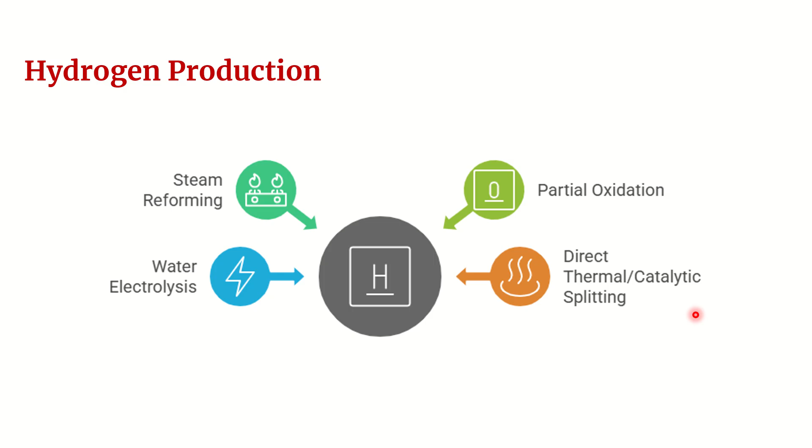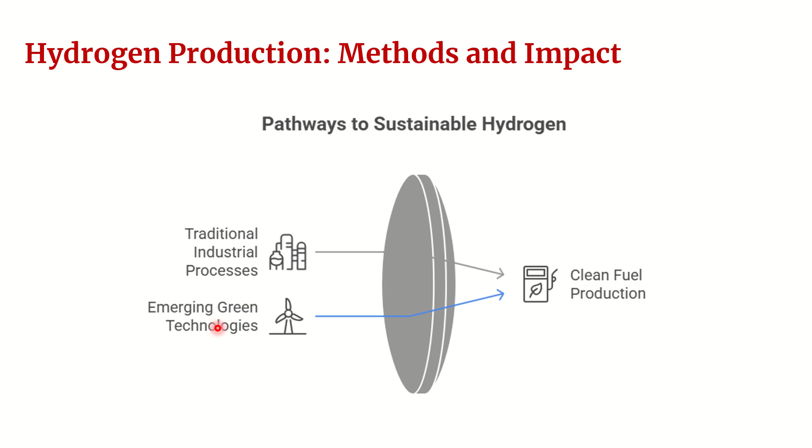The hydrogen production methods combine the traditionally available industrial processes and also emerging green technologies to produce the clean fuel.

Steam methane reforming is one of the methods of production of hydrogen. It is the most widely used method for industrial hydrogen production, primarily from natural gas, and it is a thermochemical process. The process involves the reaction between methane and steam at high temperatures around 700 to 1000 degrees Celsius and pressure 3 to 25 bar over a nickel based catalyst. The main reaction is methane with water to produce carbon monoxide and hydrogen, and it is an endothermic reaction which requires significant amount of heat. Process-wise and economically, it is an efficient method which meets the growing demand for energy.

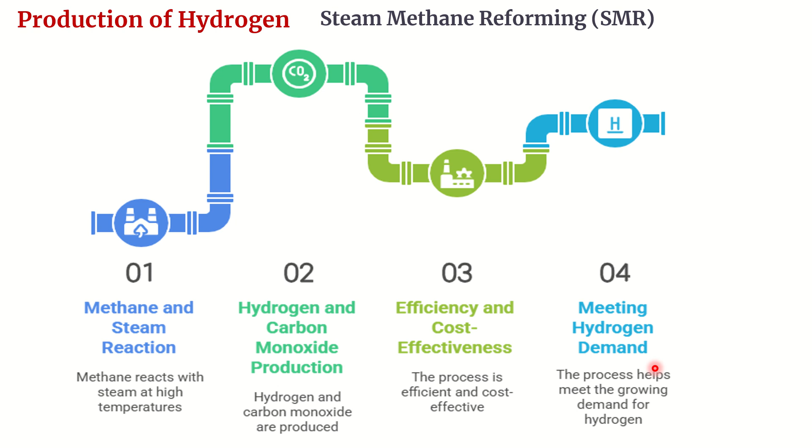Then the technical aspects with respect to steam methane reforming method. In this method, selecting a suitable catalyst is a prime factor. Mostly nickel-based catalyst on aluminum oxide are commonly used. The heat input, as I mentioned, it is an endothermic reaction which requires external heat, often supplied by burning a portion of natural gas or other byproduct gases. The reaction which converts methane and water into carbon monoxide and hydrogen involves an additional step, which is a water gas shift reaction.

The carbon monoxide produced is further reacted with steam in a second step to produce additional amounts of hydrogen and carbon dioxide. This occurs at lower temperatures, around 200 to 450 degrees Celsius, in the presence of a catalyst like iron, chromium, or copper zinc catalyst.

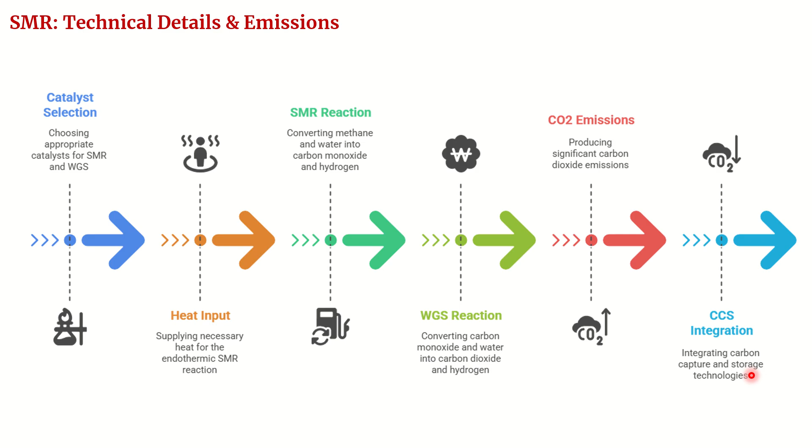This process, when integrated with carbon capture and storage, can yield blue hydrogen. If this carbon capture and storage integration is exempted, then it produces around 9 to 10 kg of carbon dioxide per kg of hydrogen produced. When combined and integrated with carbon capture and storage, the steam methane reforming process can produce blue hydrogen.

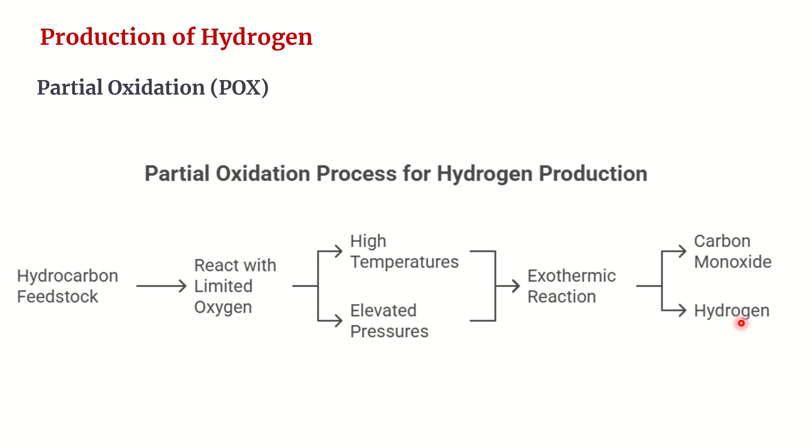Then the next method, partial oxidation. Partial oxidation is again another thermochemical process for hydrogen production, which is suitable for various kinds of hydrocarbons, including natural gas, fuel oil, and coal. The hydrocarbon feedstock reacts with a limited amount of oxygen at high temperatures around 1000 to 1500 degrees Celsius at elevated pressure, and it is an exothermic reaction. The reaction is methane with oxygen to produce carbon monoxide and hydrogen, and it is an exothermic reaction.

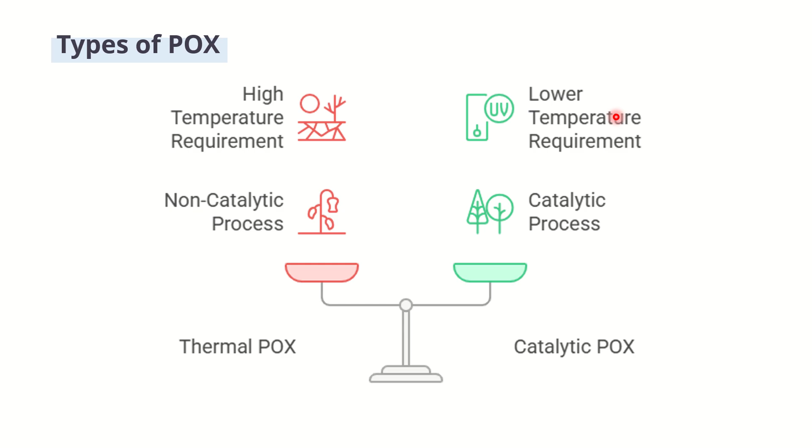The types of partial oxidation process are thermal partial oxidation process and catalytic partial oxidation process. Thermal partial oxidation process does not require any catalyst; it is a non-catalytic process but requires high temperature. Catalytic partial oxidation process, obviously, requires a catalyst, most often platinum on aluminum oxide, which operates at temperatures around 800 to 900 degrees Celsius. This process is generally faster and requires smaller reactors, but they are sensitive to sulfur impurities.

Then again, production of hydrogen by the water electrolysis method. Water electrolysis is a process that uses electrical energy to split water into hydrogen and oxygen. When powered by renewable electricity, it produces green hydrogen with near zero greenhouse gas emissions.

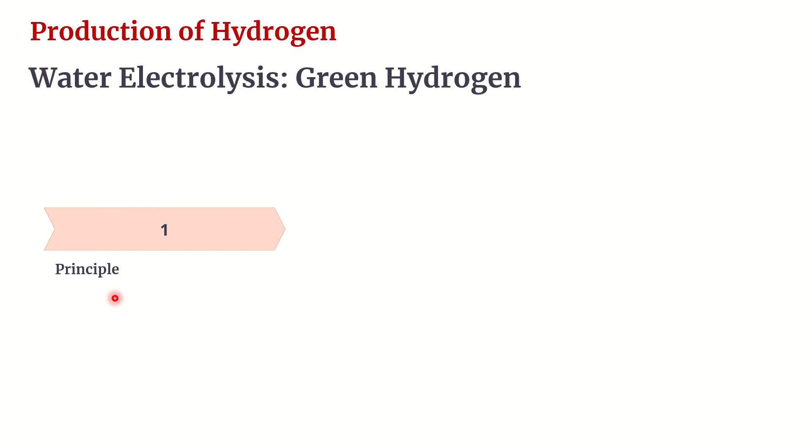What is the principle involved in this water electrolysis method? It is the reverse of fuel cell operation. What happens in fuel cell operation? In the fuel cell process, hydrogen and oxygen combine to produce electricity and water. In electrolysis, electricity is used to break down water to produce hydrogen and oxygen. So the overall reaction is: water, in the presence of electrical energy, produces hydrogen and oxygen. Water is split with the help of electrical energy into hydrogen and oxygen.

It is an electrochemical process which involves anode oxidation and cathode reduction. In anode oxidation, the water molecules lose electrons to produce oxygen gas and protons, which depends on the electrolyte used. Then in cathode reduction, protons or water molecules gain electrons in order to produce hydrogen gas.

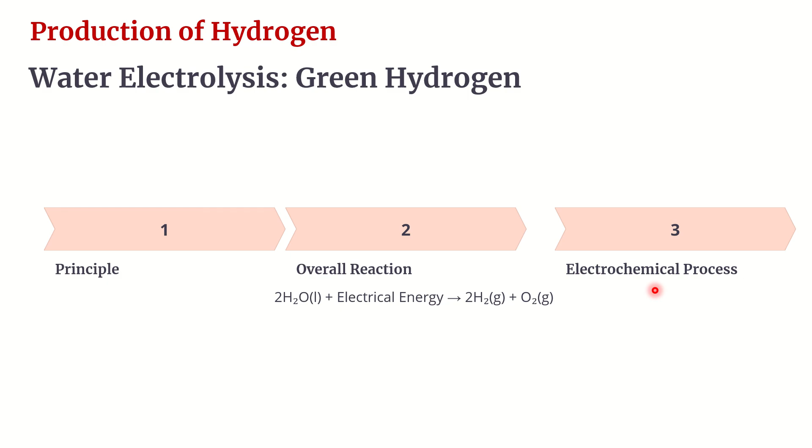There are various types of electrolyzers used for this purpose: alkaline water electrolyzers, proton exchange membrane electrolyzers, and solid oxide electrolyzers. Alkaline water electrolyzer uses an aqueous alkaline electrolyte like potassium hydroxide and typically operates at temperatures of 70 to 100 degrees Celsius.

But there are certain drawbacks in this process, like its lower current density and also higher gas crossover.

Proton exchange membrane electrolyzers use a solid polymer electrolyte membrane that conducts only protons. This operates at lower temperatures, around 50 to 80 degrees Celsius, and at higher current densities with good dynamic response, making this process suitable for coupling with intermittent renewable sources. The drawback is that it requires expensive catalysts like platinum group metal catalysts.

Then solid oxide electrolyzers, which use a solid ceramic electrolyte and operate at high temperatures around 600 to 900 degrees Celsius. This high temperature allows for use of steam, reducing electric energy input and increasing the efficiency.

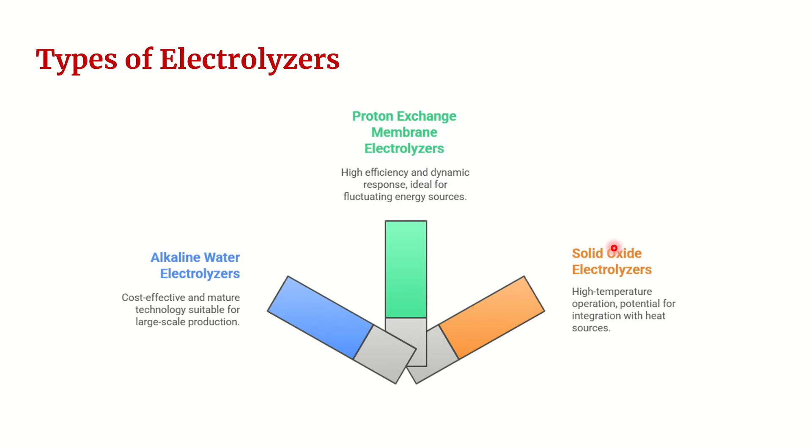Then the next method: direct thermal and thermochemical water splitting methods. These methods use high temperature or a catalyst to split water directly without consuming electricity.

Direct thermal water splitting: the principle involves heating water to extremely high temperatures, more than 2500 degrees Celsius, to dissociate water directly into hydrogen and oxygen.

But the drawback is it is an extremely high temperature process, so the material challenge involved in the reactor design is a major drawback. The simultaneous production of hydrogen and oxygen at such high temperatures also presents a challenge in separating them to prevent recombination. This method is largely not that economically or technically feasible.

The other method is thermochemical water splitting, which utilizes intermediate compounds to split water at much lower temperatures, around 500 to 2000 degrees Celsius, which is lower than direct thermal water splitting. The intermediate chemicals can be regenerated and recycled within the closed loop, and that is the main advantage compared to direct thermal water splitting method.

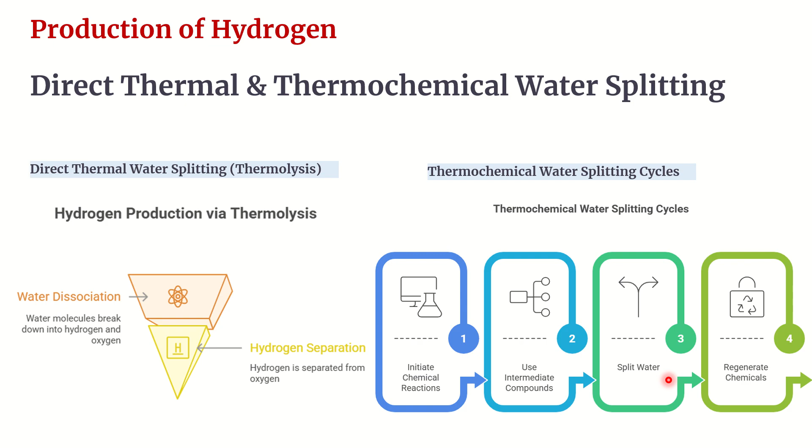What are the intermediate chemicals used in this thermochemical process? There are sulfur iodine, hybrid sulfur, cerium oxide. In case of sulfur iodine cycle, there are three steps involved: sulfur trioxide, sulfur dioxide, and hydrogen iodide. This operates at temperatures around 850 degrees Celsius.

Hybrid sulfur is a two-step cycle where sulfur dioxide is oxidized to sulfuric acid electrochemically, and the sulfuric acid is then thermally decomposed to sulfur dioxide, oxygen, and water vapor. In cerium oxide cycle, a two-step metal oxide cycle using cerium oxide requires very high temperature, up to 1500 degrees Celsius, for the reduction step.

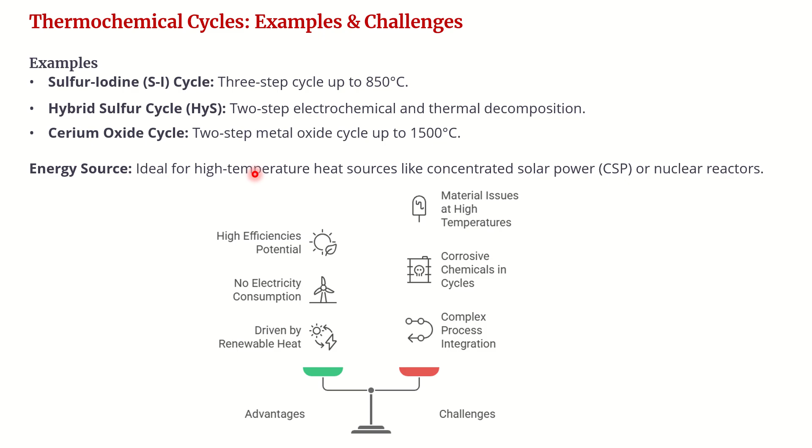The advantages of this method are potentially high efficiency, and it can be driven by high temperature renewable heat sources. What are the challenges involved? High temperature still poses material challenges, corrosive chemicals in some cycles, and complex process integration.

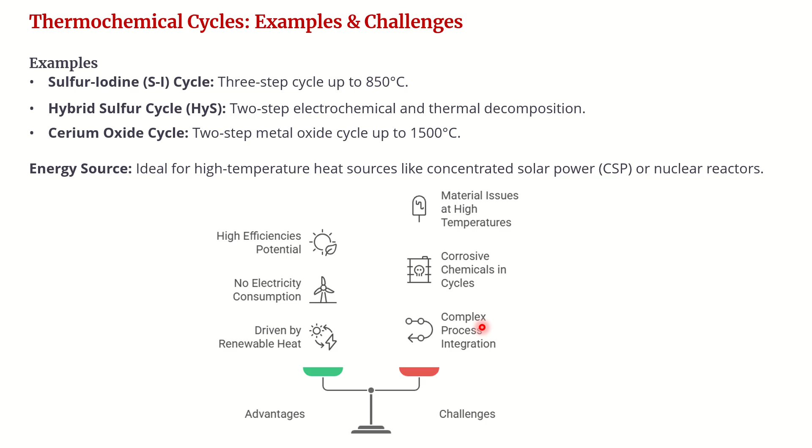Next topic: fuel cell technology. Fuel cells are electrochemical devices that convert the chemical energy of a fuel, for example hydrogen, natural gas, or methanol, and an oxidant, directly into electrical energy through a controlled electrochemical reaction without any combustion reaction. So they are highly efficient and produce very low emissions.

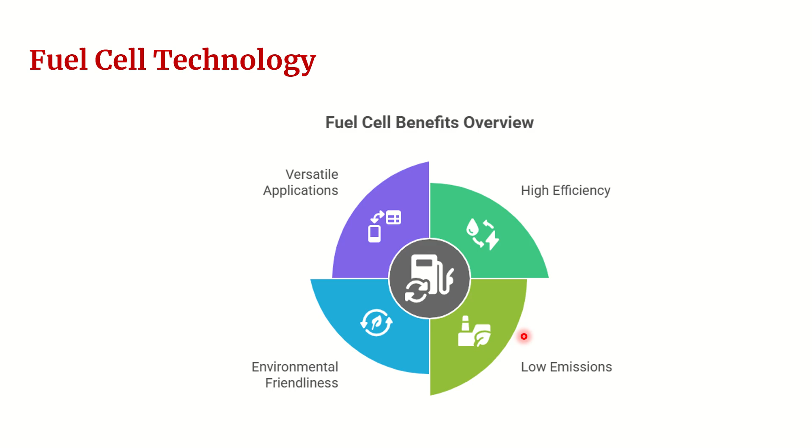What is the electrochemistry behind fuel cell operation? The fuel cell consists of two electrodes, one anode and one cathode, separated by an electrolyte. A catalyst, typically platinum for hydrogen fuel cell, is coated on the electrodes.

In the anode oxidation reaction, fuel is supplied to the anode where it undergoes oxidation, releasing electrons and ions. In the cathode reduction reaction, oxygen is supplied to the cathode where it reacts with the electrons and ions to form a product, typically water, producing electrical energy with some heat. So the overall reaction is the combination of fuel and oxygen to form a product.

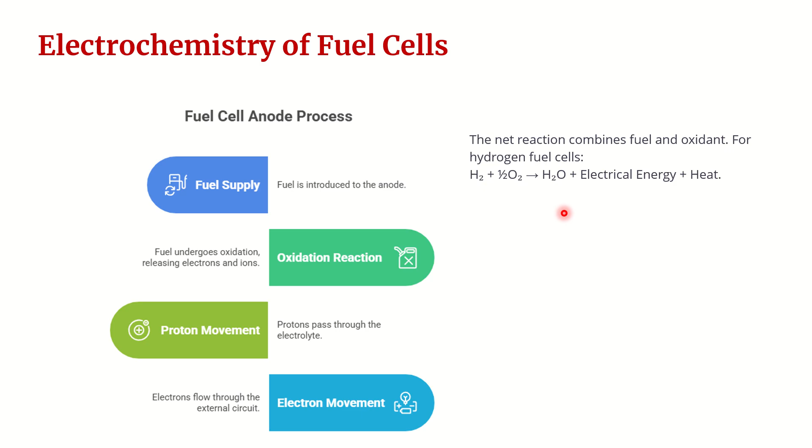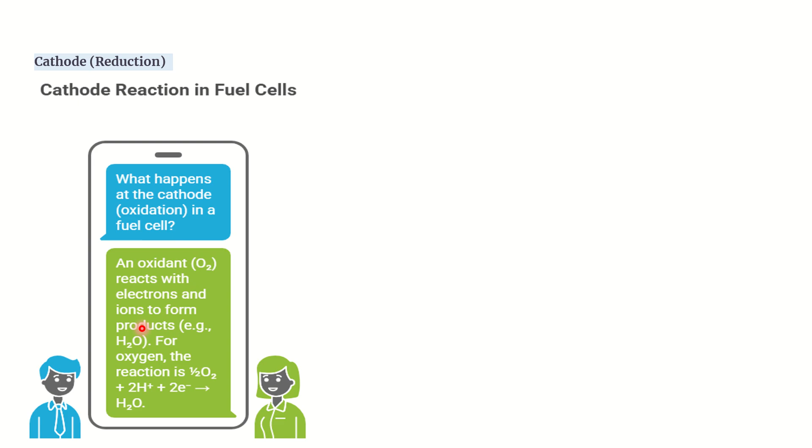So in the cathode reaction, oxygen reacts with electrons and ions to form the product, water. The overall process involves hydrogen and oxygen combining to initiate the reaction. Water is produced as a byproduct. Electrical energy is generated as the primary output, and heat is released as a secondary output of the reaction.

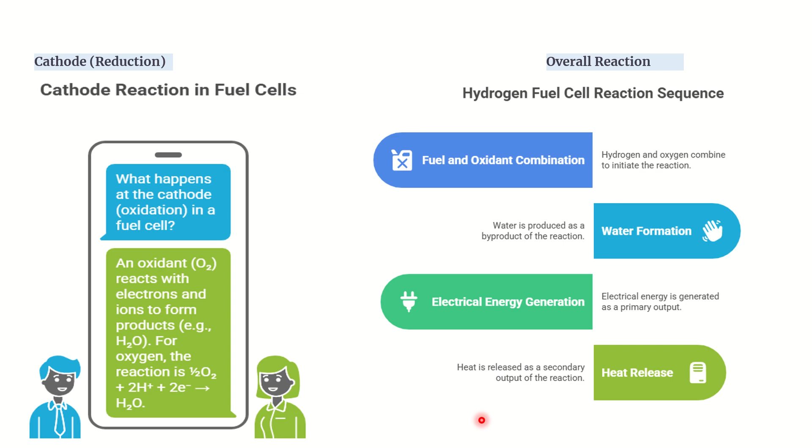What is the thermodynamics involved in fuel cell operation? Gibbs free energy: the maximum theoretical electrical work that can be extracted from a fuel cell is given by the change in Gibbs free energy at constant temperature and pressure. This work W equals the change in Gibbs free energy, which equals NFE, where N is the number of moles of electrons transferred per mole of fuel, F refers to Faraday's constant, and E is the standard electromotive force.

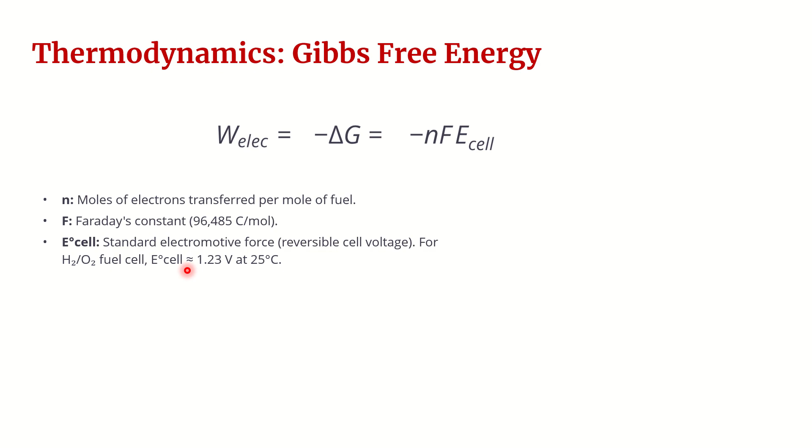Regarding the enthalpy-entropy concept: the total energy released from the reaction includes electrical energy and heat. The difference between heat of reaction and the electrical energy generated represents the heat generated by the fuel cell. The change in entropy contributes to heat generated or absorbed. So the change in Gibbs free energy equals the change in enthalpy minus absolute temperature T times the change in entropy. Unlike heat engines, fuel cells are not limited by Carnot efficiency as they convert chemical energy directly.

The theoretical maximum efficiency of the fuel cell is determined by the ratio between the change in Gibbs free energy and the change in enthalpy. The actual efficiency is lower due to irreversibilities that cause the actual operating voltage to be less than the electromotive force. So the actual efficiency is the ratio between actual electric work output and the total energy input in fuel.

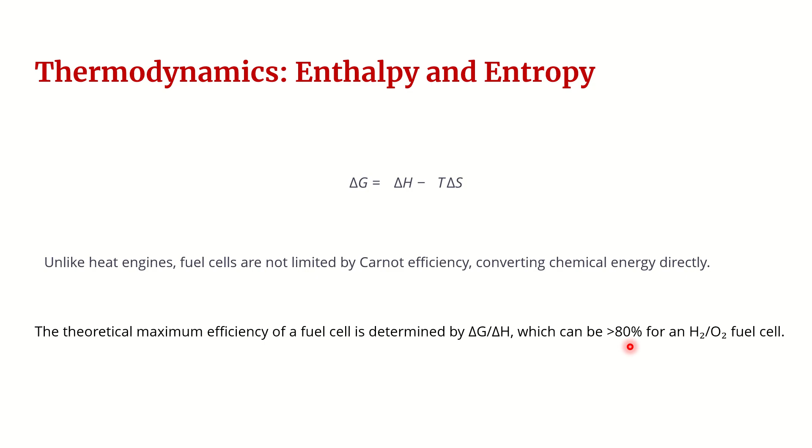The fuel cell efficiency is given by the ratio between actual electrical work output to the total energy input to fuel, represented by this expression.

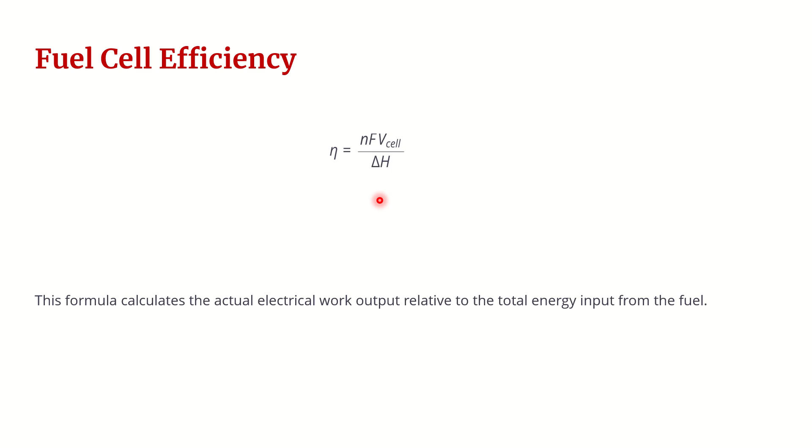With this we are completing the basic principle about fuel cell operation. Next, proton exchange membrane fuel cell.

What is a proton exchange membrane fuel cell? This is also known as polymer electrolyte membrane fuel cell, a type of fuel cell characterized by its solid polymer electrolyte membrane which conducts protons. They operate at low temperatures and have high power density, making them suitable for automotive and portable applications.

What are the components of the proton exchange membrane fuel cell? The core components are the proton exchange membrane, anode and cathode catalyst layers, gas diffusion layers, and bipolar plates. The proton exchange membrane is a thin solid polymer film, for example Nafion, made of perfluorosulfonic acid, permeable to protons but impermeable to gases like hydrogen and oxygen. It acts as the electrolyte.

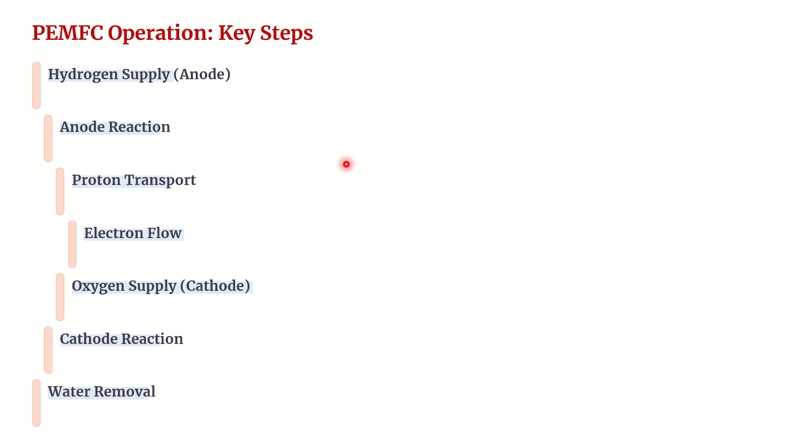Next topic, clean fuels. What are clean fuels? They are energy sources that produce significantly less pollution, particularly greenhouse gas emissions and other pollutants, compared to conventional fossil fuels when burned. Their use is central to achieving cleaner technologies and sustainable goals.

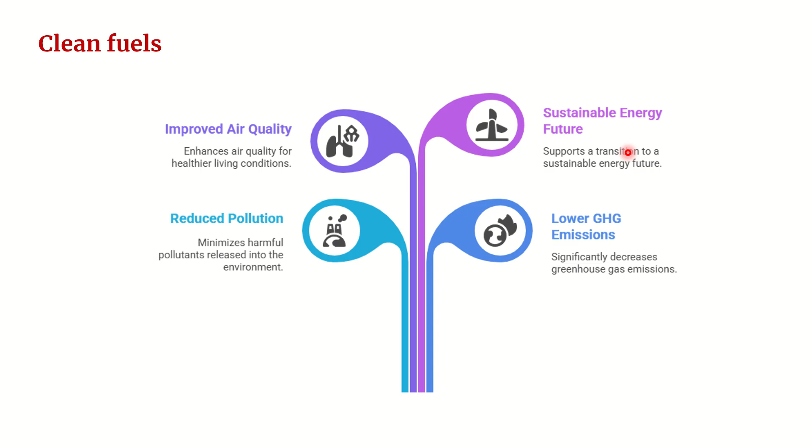What are the various sources of clean fuels? First, hydrogen, a versatile fuel. When burnt with oxygen, hydrogen produces only water, making it a zero emission fuel at the point of use. Fuel cell electric vehicles, power generation, and industrial feedstocks are certain areas of application of hydrogen.

Then biofuels, fuels derived from biomass like biodiesel, bioethanol, sustainable aviation fuel, and biogas. Biodiesel is produced from vegetable oils or animal fats through transesterification. It can be blended with petroleum diesel or used directly in diesel engines, reducing particulate matter, carbon monoxide, and greenhouse gas emissions compared to fossil fuels.

In case of bioethanol, which is produced by fermenting biomass, it can be used as a blend with gasoline, reducing carbon monoxide and some hydrocarbon emissions. Sustainable aviation fuel, another biofuel, is used as jet fuel meeting specific sustainability criteria, and can significantly reduce greenhouse gas emissions for aviation.